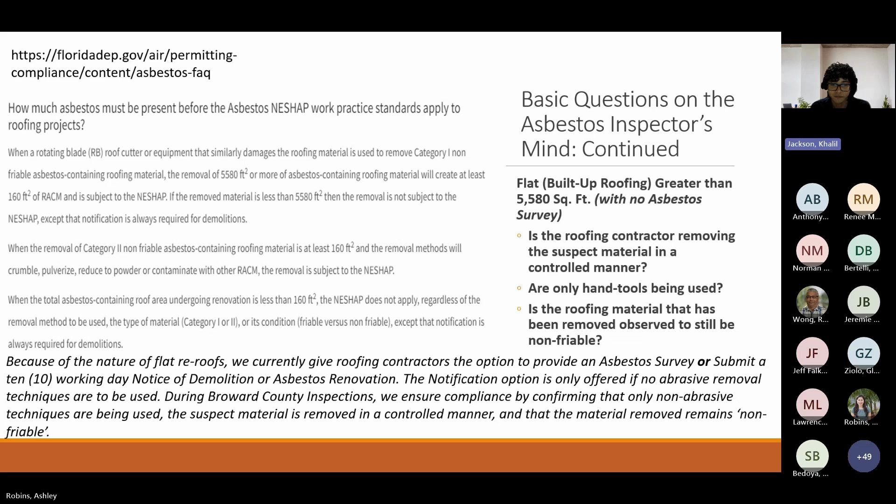But in the case of when I still have and will be inspecting roofing jobs, I'll ask, are they removing it in a controlled manner? Are only hand tools being used? And is the roofing material in the waste disposal site, the dumpster, observed to be non-friable? So because we're not going to be accepting notices for flat re-roofs without an asbestos survey, if there is no asbestos, we can go to the next slide. And if you have any questions, you can ask me.

And Jamie brought up a good point. In violations of NESHAP, the fines are substantial as asbestos is a hazardous material. So 10,000 per day per violation. That is definitely on the table, depending on the nature of the violation.

So when you're going through the ePermits application, there are two things to know: that you may have an asbestos inspection after you get your certificate of submittal. So if you select any of these options for demolition, you should know once you get the certificate, a Broward County inspector may come by randomly for the site inspection.

And of course, these are for all facilities that are not single family exempt. Even the facilities that are exempt from the fees, so public schools, Broward County owned and operated facilities, they may be exempt from the fees, but they're not exempt from the inspection. And then, of course, when regulated asbestos containing materials are to be abated, and we'll talk about what makes ACM regulated.

So yeah, like Stephen was hinting at, we often look at the surveys because it depends on the material that is asbestos containing material. Just because the survey shows asbestos doesn't mean it has to be removed or doesn't mean it has to go through the 10-day notification process. But we'll do a crash course on when you need to fill out that notice.

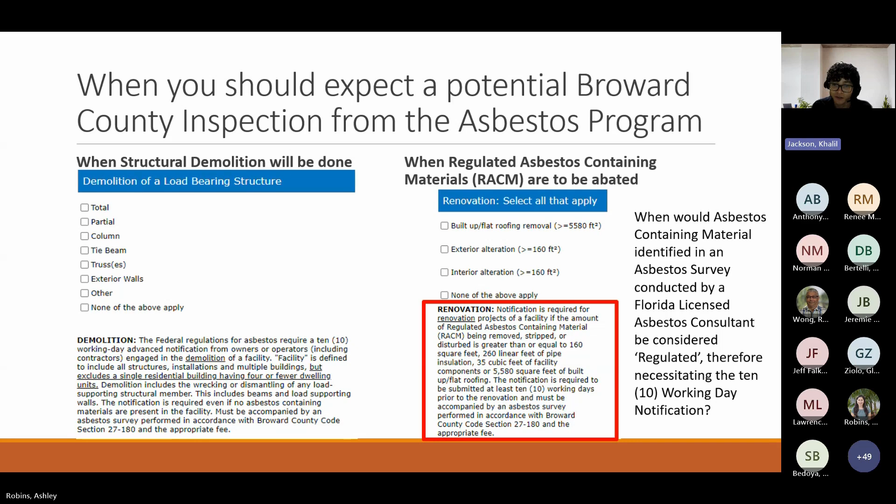So like Stephen was saying, friable asbestos containing material is the most dangerous because if it's getting into the air, you can breathe it in. If it's getting into the air, depositing into waterways, and it's ingested, those are routes of entry that cause the negative health outcomes of diseases like asbestosis, lung cancer, and other preventable diseases because of this hazardous material.

So by definition, friable ACM is any material with more than 1% asbestos that when dry can be easily reduced to powder. So a common friable ACM that is everywhere is popcorn ceiling treatments, spray applied textures, things that you can pulverize with hand pressure. That's friable and that's dangerous.

So if it's over 160 square feet, 260 linear feet, so that's mainly with piping. So if you have an asbestos pipe and or insulation wrapped around a pipe that's in poor condition, that's the 260 linear feet, or caulking, window caulking. It's measured by linear feet, or 35 cubic feet of off facility components. And off facility components means if the material is off the facility, if it's in a pile, you would measure it by cubic feet. What about chipping out floor tile with the spud bar?

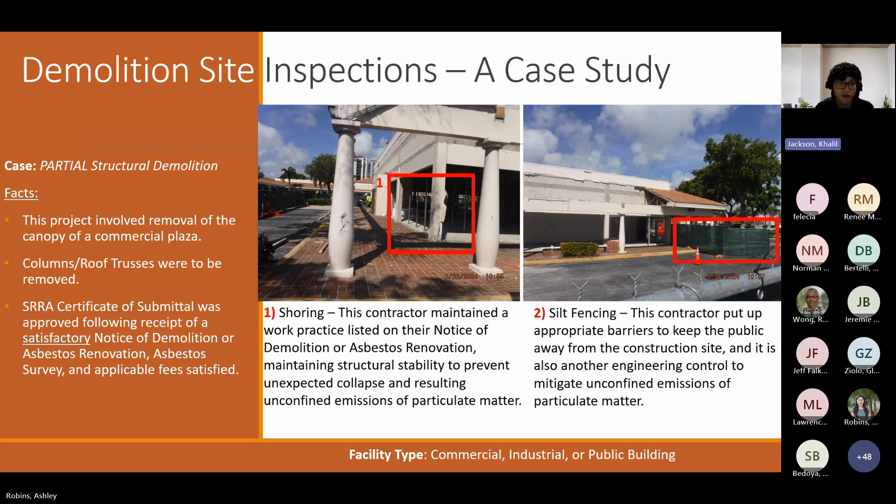So you can see in the smaller of the red boxes, I can see that there's water on the floor. So I'm like, okay, the water must be over there. I'll walk around. I see they have silt fencing, and then I'll just peek through the fence, and I can see the hose, and I can see the water, and I can see that they're actively using it while demolishing it. That's the golden scene as an inspector. It's the thing that makes me happiest. And obviously they were using water, silt fencing was up, there's no excessive particulate matter emissions, and they passed the inspection. It's in compliance.

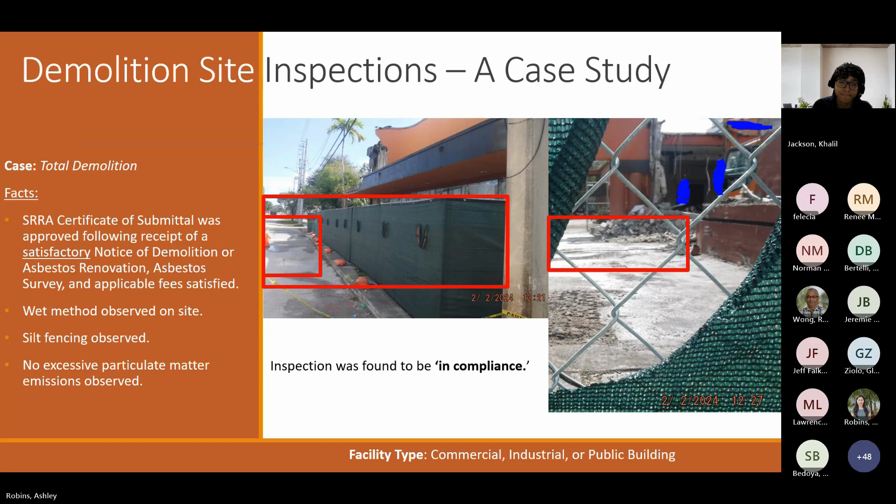Now, this is a case of a non-compliant demolition site inspection. So, a fun fact, this building did have asbestos in it. However, we do make people get statement of responsibilities, certificate of submittals based on the scope they do. So there was an asbestos contractor who obtained their own certificate approval, abated the asbestos containing floor tiles, the category 1 ACM, prior to demolition.

And this one is a random inspection, more than random. It was not planned during that day, but I was driving through the boulevard. I thought maybe it was just some fog, and I looked to my left, and there's a total demolition of a building, and I'm driving through the dust. That is non-compliance.

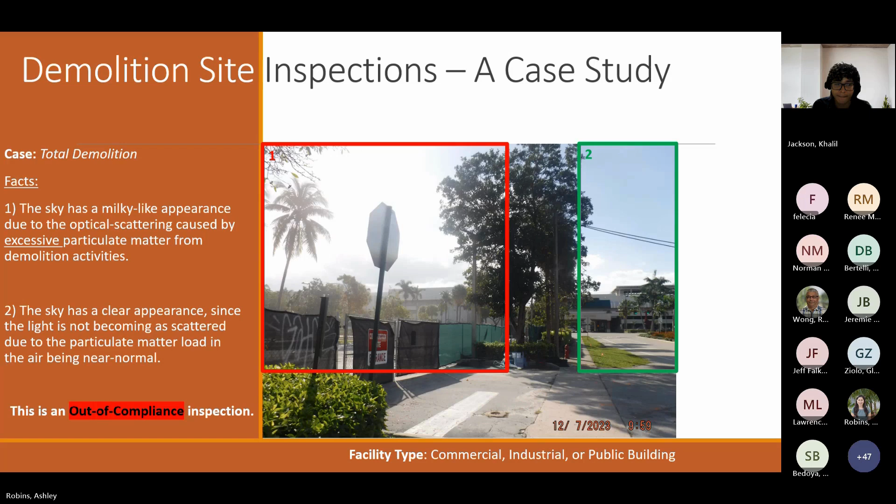In the next slide. However, there are ways, like we're not trying to find the violation and then fine you. Like there's a lot that goes into it. It is a violation. However, working with the inspector really does help your case. I had to go speak with the site supervisor, tell him that the amount of dust was unacceptable, and I asked him, did he receive any complaints? And that was his first question. Did you get a complaint? It should not be where you get a complaint to do something about it.

You, as the contractor, should know, regardless of if you could get a complaint, if you see that, do what you need to do to mitigate it. So right after being on site and speaking with them, they quickly used their water method that they should have been using for the demolition. It was used right after I spoke with the site supervisor and the contractor. And you could see the difference after they started spraying down the material and when they were demolishing, the dust

ended up settling. So since I observed the corrective action on site within 15 minutes of being there, we can remedy the violation, because it still is one, as compliance without formal enforcement action. Doing this logs the violation, but it doesn't go through the whole notice of violation route.

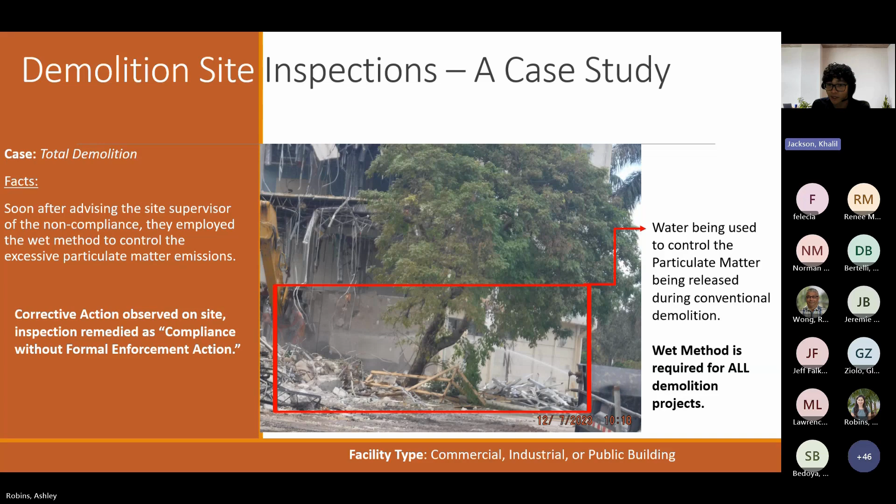But since the corrective action was observed as soon as possible, and they were made aware, and of the fact that everything has a history when we log it with the state, as Stephen was saying, we send all of our notices as the local program to the Florida Department of Environmental Protection so that they know about it. And it's a database. We can go back decades in projects.

In the next slide. So now we're getting to the asbestos renovation inspections. So this one, like I said, was abatement of category 1 ACM. It was floor tiles. It had 2 to 10% asbestos content in both the tile and black mastic. It was over 160 square feet, and it wasn't a single family exempt home. We knew the certificate was issued because that's why I went to inspect.

We'll look into signs of if negative air is being used. So in box 2, you see the 6 mil polyethylene plastic barriers blowing inward. If it's blowing inward, it means negative air is being used because the air is going in one direction and out the other. And you can trace the unidirectional flow of the air in 3 and 4. This one was a really cool inspection. I liked it. I give props to this contractor.

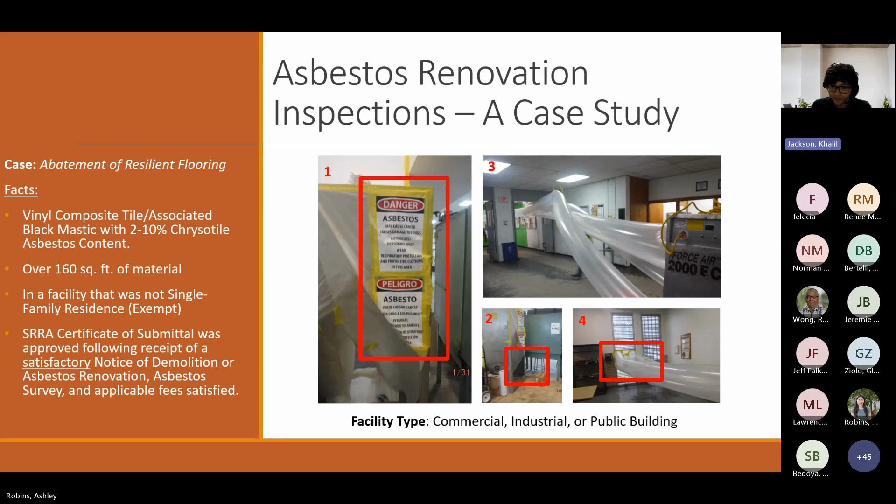So they had the air flowing out through one exit point, and it was clean air going out through one exit point after it went through a HEPA filter. And the HEPA filter makes sure that the asbestos fibers, if there are any, because they're also using wet method to put those fibers down, is clean air. So like I said, asbestos danger signage was posted in clear view, visible and unobstructed. The evidence of negative air was there. You can tell the air is going in one direction and out the other.

It's well contained. The plastic barriers are unbroken. If there was a hole in this plastic barrier, that is not containment. So making sure that your containment has plastic or 6 mil polyethylene that is unbroken is very important. And it's going through a designated exit point as clean air. And that's how you pass an asbestos inspection.

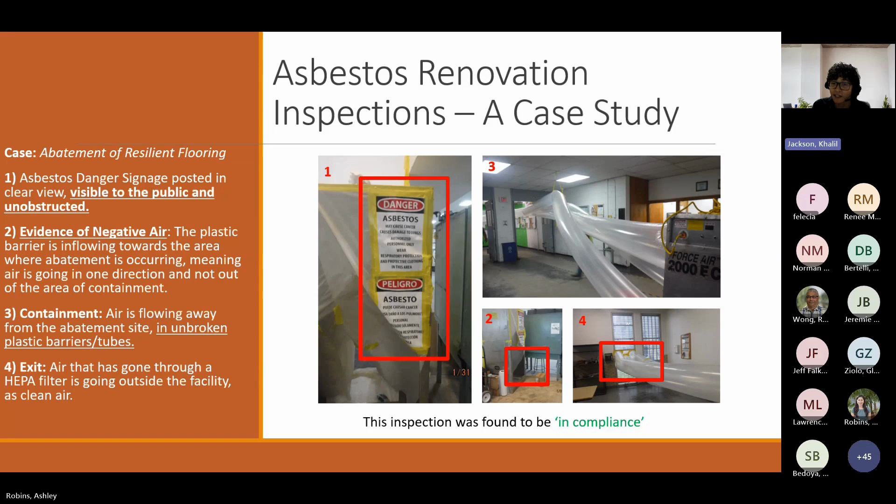And I wanted to shift it to apartments. So there's commercial facilities, but then there's also apartments. The apartment ones are definitely more difficult logistically for the contractors, but you still have to make sure the job is contained. So it was, again, floor tile that they were abating. It had 5% chrysotile asbestos content, over 160, and they did have the certificate. They had the danger signage posted in clear view, not obstructed. You could see the negative air, which is the barriers blowing inward.

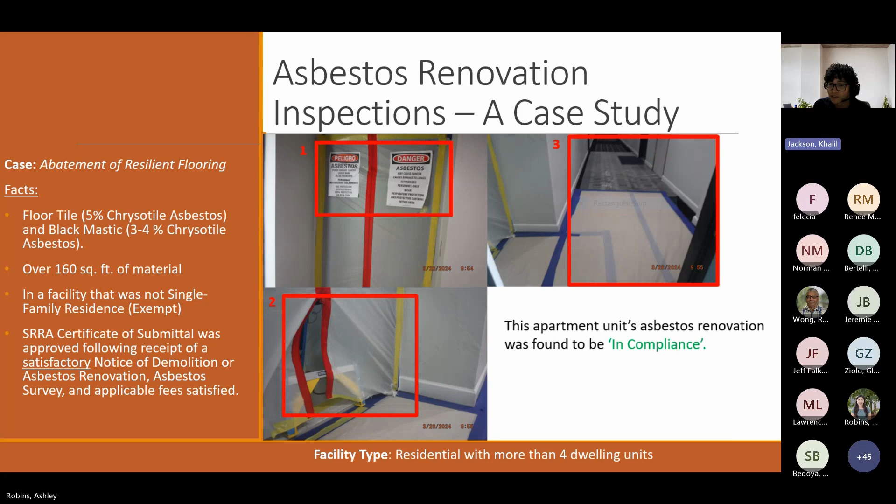And they also put another engineering control. They put plastic wraps on the hallway because you should be fully decontaminating when you enter and exit the containment area. So these things are extra measures to make sure that if there is any residue, that it's not on the actual external facility where other people frequent.

So an important part to know is that just because you have these plastic barriers on the floor, there should not be any visual residue on the floor. What it tells the inspector is that people were not properly decontaminating from leaving the unit, and now it's outside of the containment area, and a footprint, a residue mark, that is a visible emission.

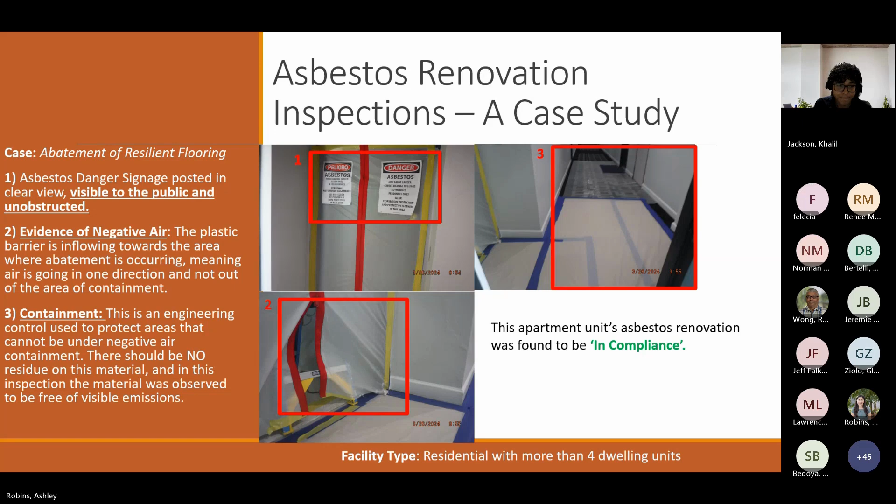It doesn't have to be dust blowing in the air, but any evidence of what should have been staying in the unit or in the containment area outside of it counts as a visible emission, because this is a public corridor. Other people walk through it. So this is a case of a bad inspection, an inspection that was out of compliance.

It was this time the drywall system, the 2% chrysotile asbestos in the white texture. Immediately when I got to the site, I had a hard time finding it, and that's not a good sign as an asbestos inspector. Eventually, I did find it because we had the notice with the location and the unit. We found the unit, but there was no sign on the door. So I was wondering, are they actually on site?

When I knocked on the door, that's when I saw the danger signage. The danger signage is supposed to be posted in public view to warn the public to stay away from it. It doesn't serve a purpose if no one can see it. If you put up the danger signage in the actual unit where only the contractors can see it, I mean, that's good. Like they had the sign, but it needs to be placed in a visible area.

And obviously, the second issue was there's a footprint outside the unit door, and it's white texture, and they are also abating the white texture. This is a sign that they were not decontaminating properly, and now it is outside the unit and it is a visible emission. And this would be significant non-compliance because any visible emission marked on an inspection sheet is not a minor non-compliance. It's a significant non-compliance.

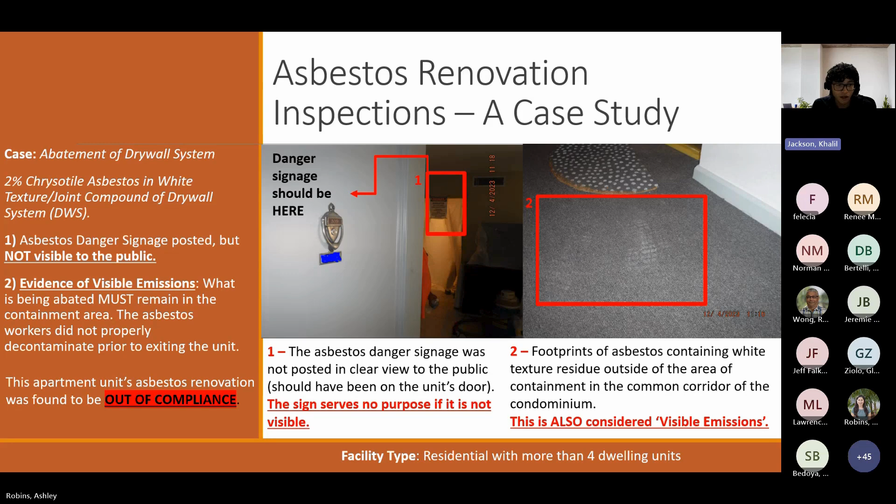And on the next slide, I had to include this one because I know we're going away from doing notices for roofs. But in the case that there is asbestos containing built-up roofing and it needs to be abated, or at least by a roofing contractor who has a competent person trained in the provisions of NESHAP, this is what an inspector will look for.

As Stephen was saying, there have been a lot of inspections where I come on site and they're throwing the roofing material from the roof to the ground. You need to have a roof chute if it's especially elevated, as this contractor did. And so that's evidence of controlled removal.

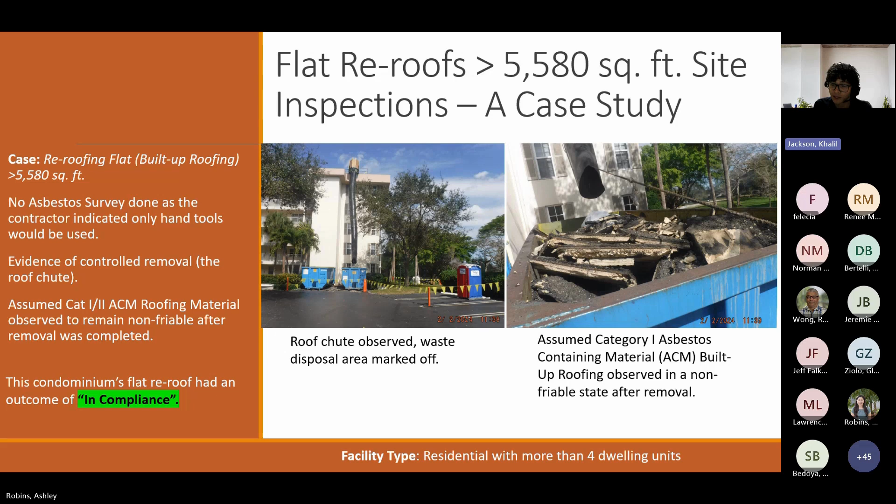And then going to the waste disposal site, you can see the built-up roofing is not friable. It's in intact pieces, meaning that it was removed by hand tools in pieces, transported down the roof chute, and still in the same pieces. If it's unbroken, not friable, that's good. And this had no asbestos survey for it. They were assuming the roofing material to have asbestos. This is how it should look. So it was found in compliance.

And then negative air. So a lot of these inspections are done outside the active area of abatement. We wouldn't go and suit up, put on a respirator to go in and observe the actual abatement because it's just as easy to make sure people are abating it correctly by observing what's on the outside. Like I said, with negative air, no visible emissions outside the unit.